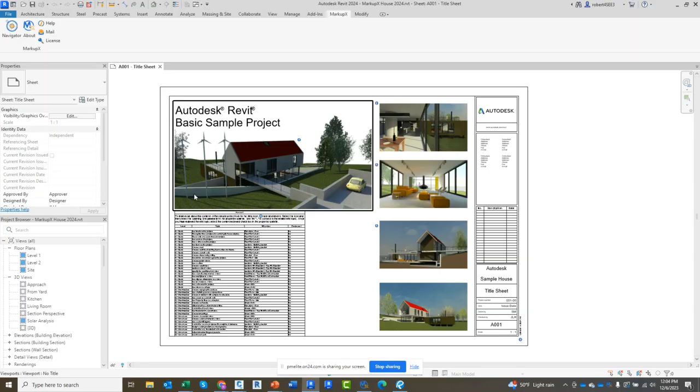All right, so here's Revit, and I'll show you the same interface as exactly for AutoCAD too. But in Revit here, you get a ribbon, and it's called MarkupX here. All you do is you're clicking on what's called our navigator. It's really simple, very easy user interface. All you do is you click on the green plus sign to import a PDF. So I'm going to grab a PDF here, and I'm going to go open.

It's going to start loading them all. Down here at the bottom, you can see how many sheets are in the PDF and then how many total markups. So you can see here it says I got 40 markups to address.

This shows you every single one from all the different sheets. If you've only got one sheet per PDF, that's fine also. But basically in the list view, all you really do here, it's pretty simple.

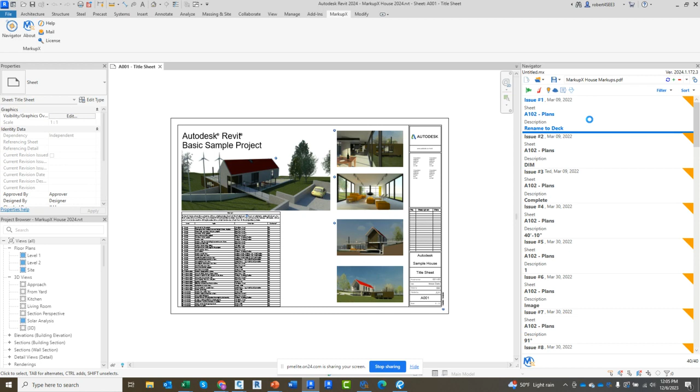You click on any one of these, and it's going to go and load the sheet automatically. So that's what it's doing right now. It zooms to the location and it displays the markup. Pretty simple. The longest thing was loading of that PDF or that sheet.

So now if I select on any one, now that the sheet's loaded, you can see how quick and responsive it is to jump to the very next one. Okay, so this is the list mode.

Now once we started getting into customers' hands, we're always listening to feedback and stuff. And some customers said, hey, this is great, I'm going through one at a time, but I'm working on this sheet right now. I'd like to get an idea of how many markups I really need to address. And so we've got this little quick filter up here.

Basically, it filters all the markups on this active sheet here. And then I've got a button here and say, just show them all to me. And it shows you every single markup that you have to address on this sheet.

Okay, these are all temporary graphics. You can't select on them. We don't add anything to your model. They do not print, but you can basically bring in any markup.

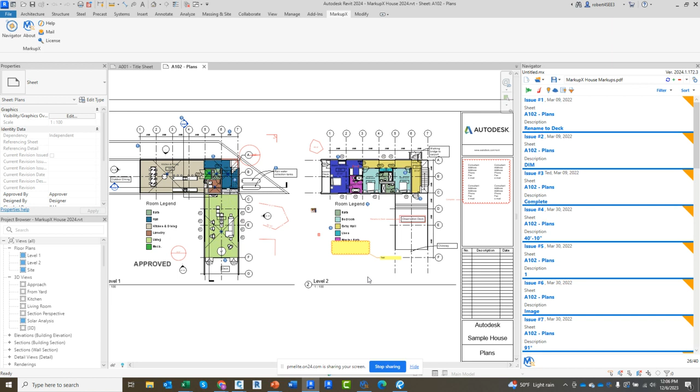I got images in here, I got symbols, you can see here clouds, you can have stamps. Any of the markups that you're creating inside Bluebeam, we would bring these in here. So I'm going to just turn that back off here, let's just turn this off.

Now I'm going to go into what's called our edit mode, because now I want to start addressing these. All I do is I double click on one of these and it takes me into the edit mode. This is the PDF. So if you didn't want to see the markup in the model, you still have the PDF here.

What do they want me to do? Oh yep, so instead of having to go to another screen, you can at least see it right here. And we're zooming to the location for you. Same thing, if I want to just go next to see the next one, there it is. Same thing.

If I don't want to see that, I can easily turn that markup off. But the idea here is we're just trying to help you address these markups faster. We don't do anything whatsoever to help fix the markup. We're just getting you to the location.

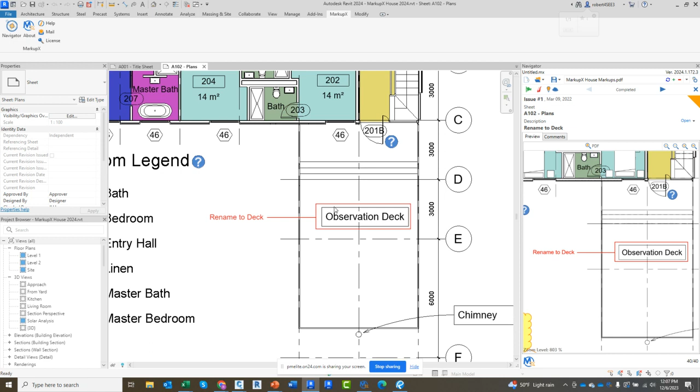You fix it. Once it's done, you just come up here and you go completed. And when you do that, it automatically jumps to the very next one. Now, this number didn't go down here, it says 40 of 40.

If I get out of this real quick, I'm going to show you why. If I come up in here, you can see I've got completed check. I'm going to uncheck that, saying don't show me any markup that is completed. So I want that number to go down.

So we don't really remove them for you, we're just changing the status quickly just so it filters those out. So now if I go okay here, now you're going to see I got 39 of 40.

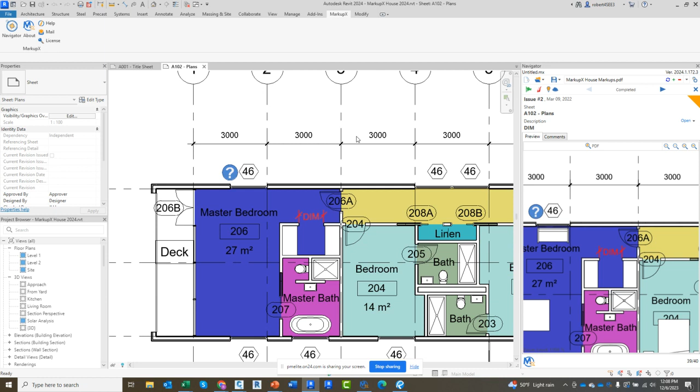So let's go back into the dimension here. There's a dimension, I'd say let's add the dimension. I'm going to go completed, and there it goes. Jumps you right to the next one. The number's starting to go down.

So we're making sure you're addressing everything, and once they're all done, you won't have anything left in your list at all. So that's the main portion of the product. That's what we built it for, was to get people quickly to the markups, show them what they needed to do instead of having to go back and forth.

Where am I supposed to go? What sheet's it on? Where am I making this markup? We're taking you right to it, loading the sheet, putting you right on that sheet quickly.

So once we went out there again, people started giving us other ideas. I talked about the doors and the windows and things like that. Now, I don't see any icons in here, mainly because I've changed this.

If I come up here to my settings, I have the ability to change where I'm reading a family name and type. I'll show you what I do here. I'm going to change this value, and I'm just going to go save.

So what it's doing now is looking at all the markups for this custom field that I have here called Finishline Insert. That's inside Bluebeam. It's looking at that field to see if it can find a family name and type. It takes a few seconds as it rereads all these things, but once it's actually in there, it's very quick and responsive. Bear with me a second.

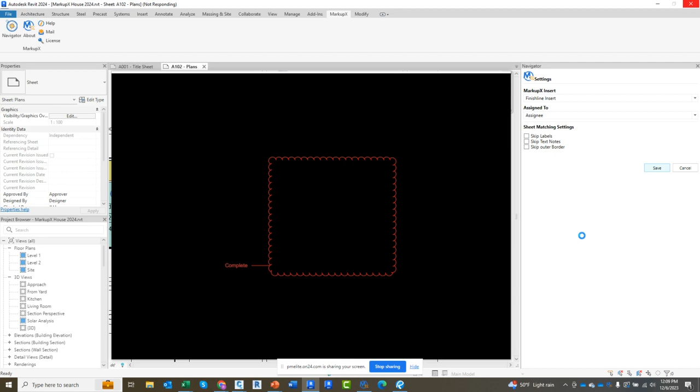While that's doing that, I'm going to quickly go over here to Bluebeam and show you. It's already there. So now if I come down in here, you see these symbols. They recognize that, hey, you've got a family that you want to place in the model. You can see some beds in here and tables.

I'm going to come up here to our filter. We got different ways to filter here. You can filter by who it's assigned to, the sheet name, description. What I'm going to do is say, can you turn off the regular markups? Just leave me the ones that are placing the families. So that's all I have left in here.

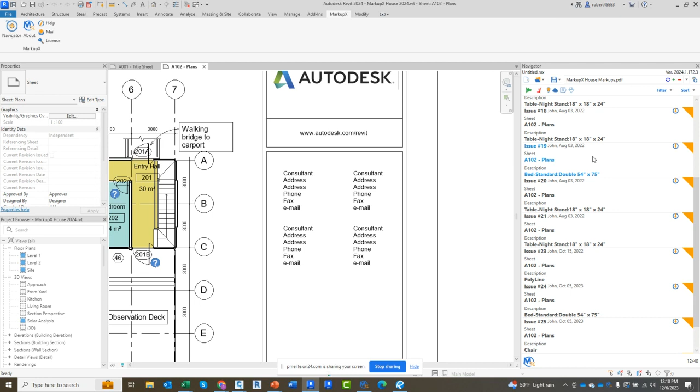Now, as you can see in here, there's some names, but I want to go down to this one first. It says polyline. If I click on that, you see it's just a polyline, that's it. But if I hover over this button real quick, you're going to see the name. It's reading: oh, hey, you want me to put in a basic wall interior 165 partition 1 hour in there. All I do is click on that, and it automatically will draw or place that family in the model.

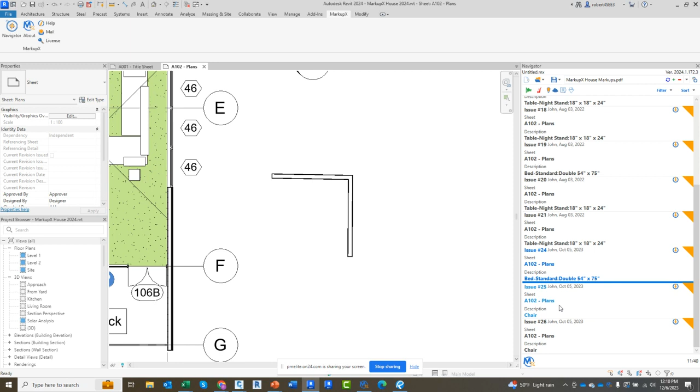So let's go down here to the chair. There you can see a chair. The red line around it is the actual snapshot in Bluebeam. Same thing, I can turn that on and off if I wanted to. I'm going to go ahead and click on this, and it's going to place that chair, and there it's placed. This is an actual family. It's in 3D. I can cut sections with this.

Let's do this one. Exact same chair, but I've actually changed the rotation on it, so it's pointing in this direction. There's your red line, same thing. I'll go ahead and say, let's place that. And there it's quickly placed that family.

Pretty straightforward. Now, if it was a door, which I don't have loaded in this one because it's a hosted family, it's just going to grab the family for you. You have to place it yourself. So chairs and stuff, no problem. Walls, I can do that. But when we're talking about a hosted one, it's going to just grab it and allow you to place it yourself.

Now, let's just go into Bluebeam and see what I actually did in here. So this is one of them. Basically what we're doing is tool chests, okay? So inside here, you can see I've got this one I've called Markups Family Insert, and there's a chair there, whatever, and I've already placed one in here.

So if I click on this, if I just quickly go to the properties in here, you'll see that I placed the family name and type in this custom field. You can create your own custom fields. You just want to be consistent that everything is always using the same custom field, because you specify, like I did a moment ago, where am I looking for this family name and type? What's the family I need to place? And so this would be it.

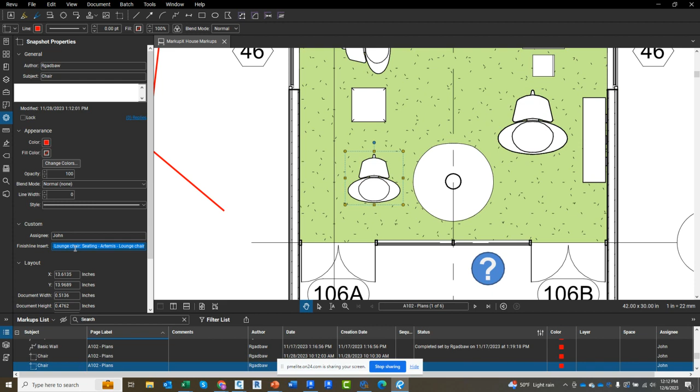But you can put it in the chair, in the subject line, you can put it wherever you want, as long as you're consistent with it throughout. And that's as easy as it is. Now let me just jump over, I want to just show the AutoCAD side of it anyway.

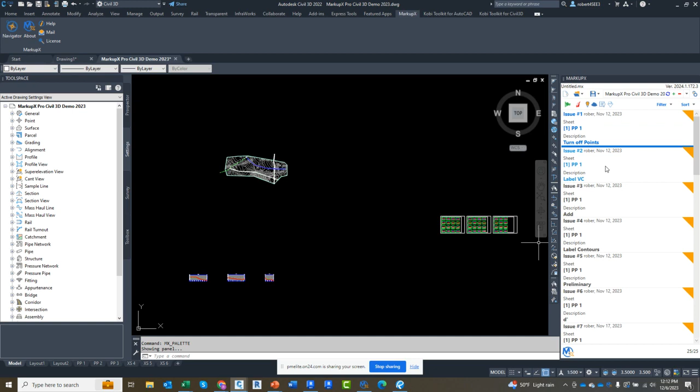So if I jump over here, for anybody that's using AutoCAD, you can see here, same interface. This one's actually working with layout, so you can see it says PP1 in here, and there'll be some down here, PP2. I actually have these down in here at the moment. All I do is click on one of these, and it's going to open up the layout, zoom to the location, and display that.

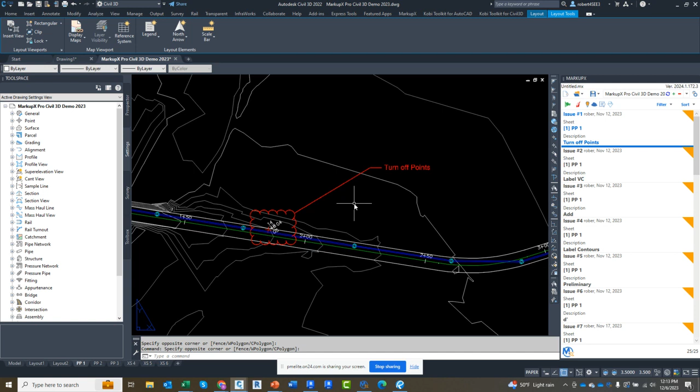Once again, these are temporary graphics, so I can't even try to select that or delete it, but yes, I can still turn it on and off. If I go into a view, there I'm inside the view. The markup will stay there if you need it to, but you don't have to leave it in if you don't want to. If I want to turn it off, I can definitely do that.

Once the sheet or layout is loaded, it's very quick and responsive going to the very next one. Very quick in there. Currently with the AutoCAD portion, Civil 3D, we're only displaying markups. My team is currently working on placing blocks, labels, lines, things like that soon, so this is very early days. This is basically the second release, but we've got a lot of things we're going to be working on moving forward. This is probably the fastest demo you guys have ever seen. I couldn't stretch this out another 30 minutes if I wanted to.

So let's open it up for some questions.

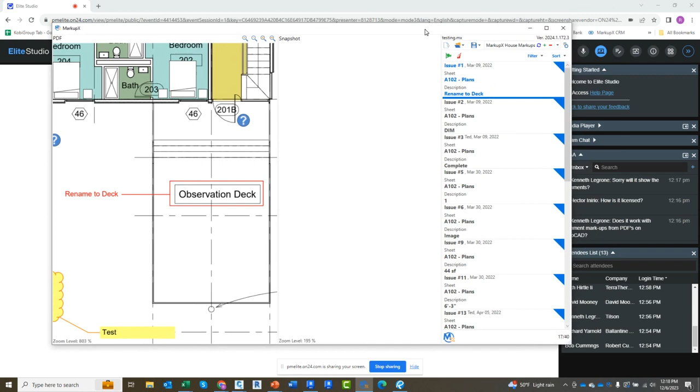There's one other quick thing I wanted to show. Also, we have this little free tool that you don't need Revit or Bluebeam for. It's basically a review tool.

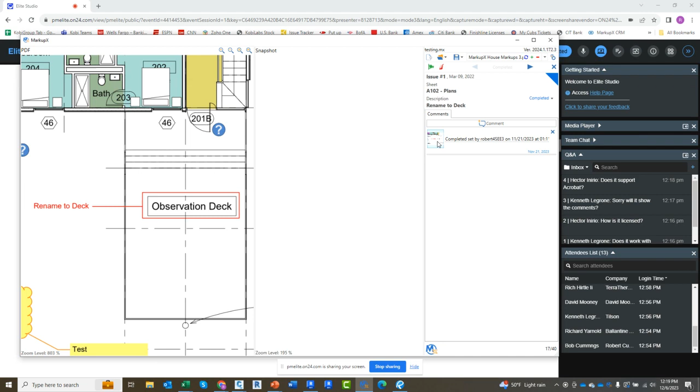You can open up somebody's project here, and you'll see I've filtered it to show just the ones everybody said they've actually completed. If I double click on one and go into edit mode, every time I hit the word 'completed' it takes a snapshot of the model at that given time and puts a comment in there. If I click on this, you can see the snapshot here - that's the model snapshot when I hit completed.

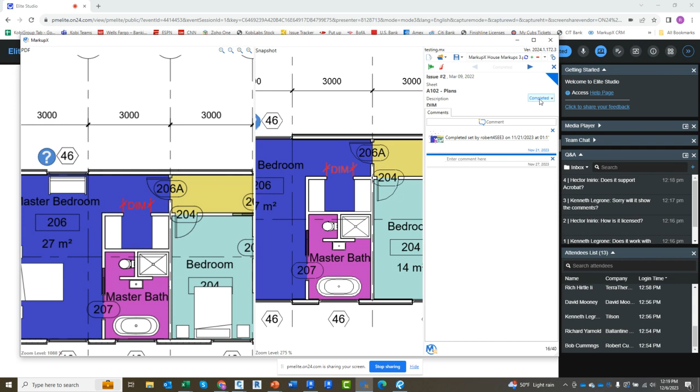This is the PDF, and as a reviewer you could go, no, you didn't do that - it still says observation deck on here, so I'm going to reject that one. Then it goes to the next one - you were supposed to put in a dimension there, there's no dimension, same thing, I'll reject that one. And this one - oh yep, that one's good, so I'm going to accept it. So you could end up getting that pushed back too.

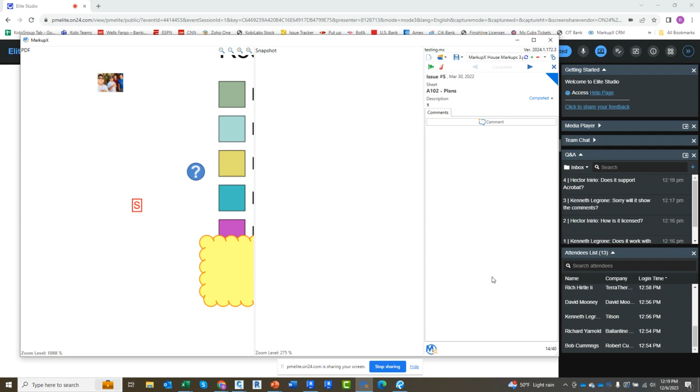It will support an Acrobat PDF. The issue with an Acrobat PDF is, let me jump into Bluebeam - if this was in Acrobat, you'd probably see the cloud as one markup, this line as one markup, the text as one markup, whereas Bluebeam basically groups them all as one. So that's the only real issue - we read the markups the exact same way, it's just a matter of whether they come in grouped together as one markup or as individual markups.

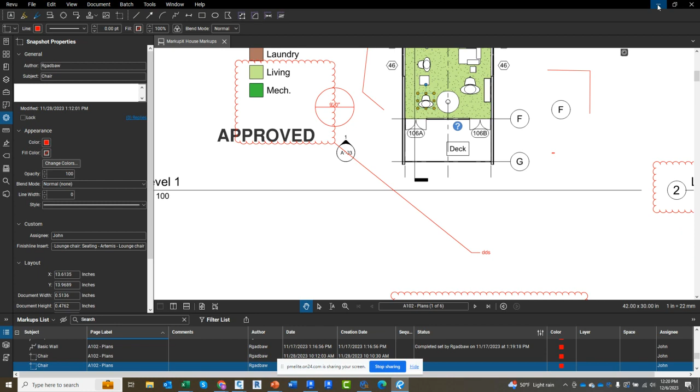But in the end it really doesn't matter, because when you're in this edit mode in Revu, whether there's a whole bunch of lines or not, it'll show you - this is the nightstand right here. It'll show you all the markups because this is a PDF, but on screen you'll only be seeing the one shown here. For people doing that, they probably just have that turned off and say, as long as I can see them all right here, that's all I care about.

Oh, they want me to remove something - they can absolutely do that. Hopefully that answers your question.

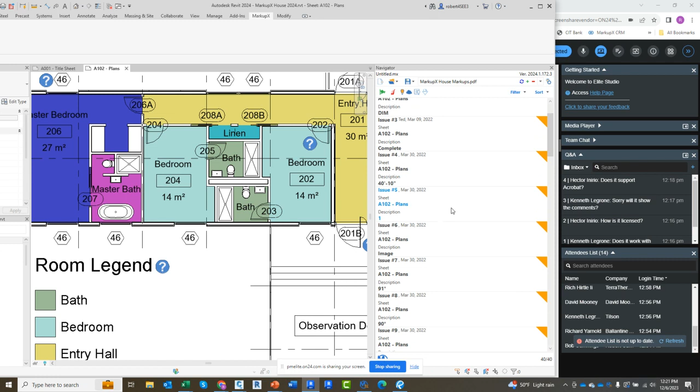I'll give you another example here - you can actually see all the markups in here, all these different markups, even though I'm only showing one here. But as you can see, we can bring in images, we can bring in all sorts of markups. Anything you're putting in, like if you do screenshots and put it inside Bluebeam, we can read those.

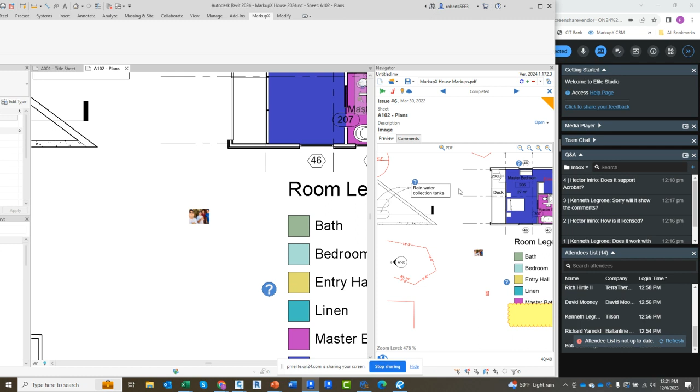Any other questions? Everybody's still in the meeting here.